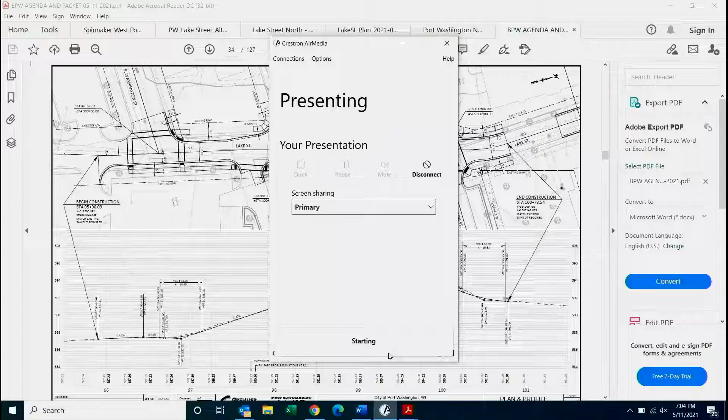Okay, super. All right, so we were standing, of course, here out in the field, and so the first thing again we looked at was trying the best we could to square up this intersection. So in order to do that, the sidewalk crosses the right-of-way line. You see the right-of-way line is here. All right, and so really you're only taking about a 10-foot by 10-foot triangle as a pedestrian easement, so that's something we'd have to discuss with the Lighthouse condos, and if we can't do it, then we'll have to go back to doing the best we can to make this intersection work, and it won't be squared up as well. But my takeaway and the consensus from the board at our meeting was that it's acceptable the way it's drawn up.

Yeah, okay, so moving downward or southward, as we discussed, by eliminating the one parking spot here. See, there would be no parking available here or here, and of course there's none permitted anyway in this block, or here, or here. So we keep parking here on the west side for this block. This allows us to create an 11.5-foot sidewalk between this, this is the new Newport Shores building here. So this 11.5-foot sidewalk would be consistent with what we have on Franklin Street, would allow us to cut out a planter, or I should say a street tree planter or two. We haven't placed those yet, but possibly some site furniture or other amenities down here.

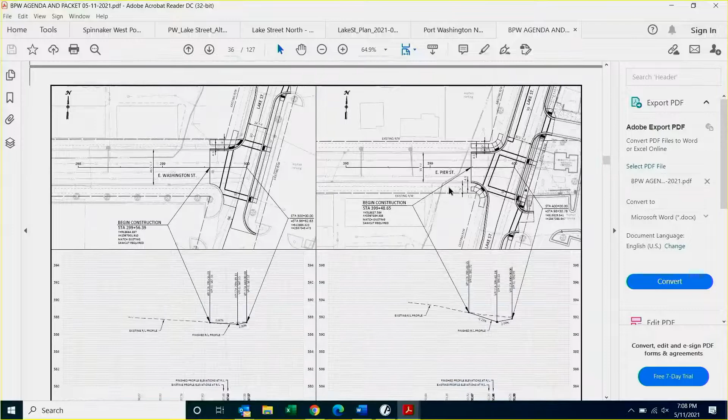Let me jump down to Jackson Street. As Dan mentioned, this is it right here, tracing the force main that we're replacing. So here's where these proposed townhomes are. If these move forward, we're going to kick the curb out here to allow them to put in driveway aprons.

That removes parking, which is what allows us to increase the terrace area. We'd bring this terrace area out a little bit too. This is just a 2-foot terrace area. And so we gently transition...

Towards Harborview Lane. And actually in reality, we'd probably carry this curb through the intersection because there's no parking there as well. One of the comments we received at the meeting was to double check the turning movements coming around here. But you can see where the existing curb is.

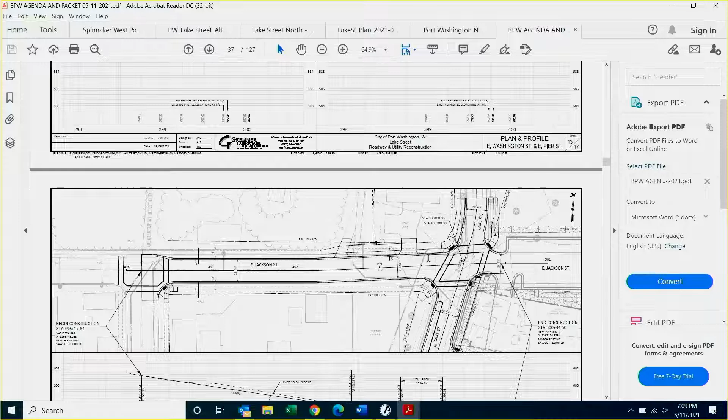This is the light. These are the light lines here. So this is actually going to improve this right turn here. And even for a left turn here, I think you're going to bring a smoother turn for semis coming around to either the filtration plant or the wastewater treatment plant.

This is the 8-foot sidewalk between the interurban trail - I guess I'd call it a multi-use path. This was an application that the city made to the DNR several years ago for a stewardship grant. We received the grant and have just been waiting for Newport Shores to kick in so we could construct that path. So now you'll have a connection between the gateway to the breakwater and the interurban.

That may be more detailed than you wanted to hear, but if you want any other details on it, I'd be happy to go over it.

Is that terrace between the back of curb and the 8-foot path wide enough to plant trees in? Or is the 4.5 feet measured from the face of curb or from the back of curb? Back of curb. So we could potentially plant some smaller trees. Yeah, yes.

When you look at a tree lawn, the bigger the better. But we have the tree planters downtown - those are only 3 feet wide by 5 feet long, and you can still fit a decent tree. Even coming in on Grand Avenue, that's only a 3.5 foot terrace, and at maturity those will be medium-sized trees, but they have really taken off. I don't know if anyone pays attention besides me coming into town, but those trees that were planted about 10 years ago have really matured well and create a nice entrance to the city.

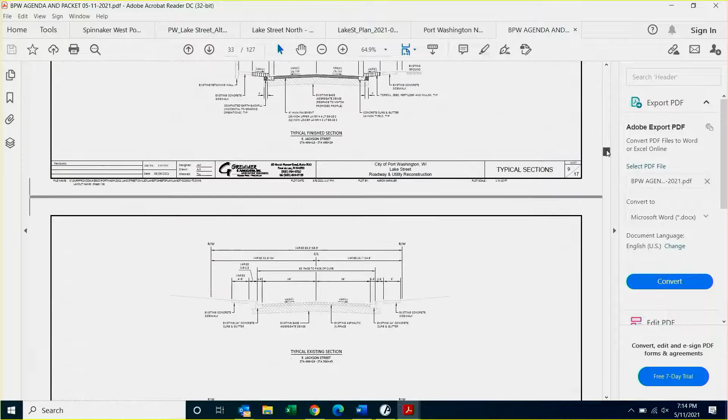Rob, back on Lake Street and East Jackson on the filtration plant side. The way that curb comes out, does it have to be that far out? You're talking here? Yes, okay. If we're trying to square stuff off, would that be better to open that up a little bit?

Yeah, I guess, well, I could ask Jeff, you'd have to come up to the microphone here, but I think it was done intentionally. Of course, this portion of it is designed by, this is the part that we're matching from Newport Shores. They designed this part. So I think what we're trying to do is essentially match the curb line, the south curb line, is what I think we're trying to do.

Yeah, is there any other reason to come out other than probably just the grade of catching this crosswalk here into here? I mean, it gives you a little bit more grade to work with. Well, I'd say it looks like about a 5-foot deflection there that it sticks out. And in that case, it's going to be visible, so it's not likely to get clipped by vehicles. So I doubt if it's that problematic.

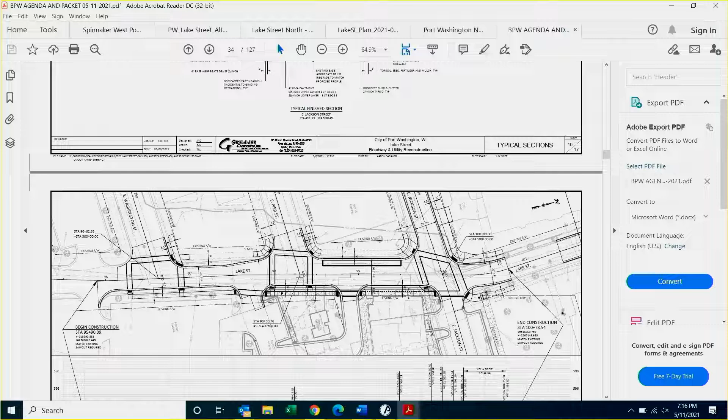Yeah, I would say it's probably going to make plowing a little easier than if you had the curb farther to the south. But I don't drive a plow. Right, they're not plowing. Right, they're not responsible for plowing Jackson anymore anyway. And honestly, I don't think that's going to affect them. Yeah, I mean, right, so Newport Shores is going to be responsible for plowing all of this, and as you can see, there are many nooks and crannies that they're going to have to plow. So I don't think this is going to add any level of complexity to the snow plowing.

Right, yeah, right. Is it wide enough for an emergency vehicle? It's kind of hard to... Oh yeah, I mean, I think right here, this is 24, and again, this was Newport Shores design, it's 24 feet. So it looks smaller than it is, but it's 2 car widths. I mean, it's two full lane widths.

So the only other comment that we really haven't addressed, Alderman Gasper has brought it up a couple times, so I'm not ignoring it, is pavers. And I guess if we have it as an alternate, would you like... I mean, are we looking at if we put them in the entire street, we're concreting the street, and then we're putting pavers over the top, and that gets a little...

Right, I'd be nervous about putting pavers just on a sand base in the street. Well, if you're doing permeable pavers, that's generally what you would do. Yeah, you have an aggregate base, and in that case you end up with a thicker aggregate structure in order to distribute the forces versus just asphalt. You can do pavers on concrete, I've done that on projects. Doesn't always work as well as you would hope. Yeah.

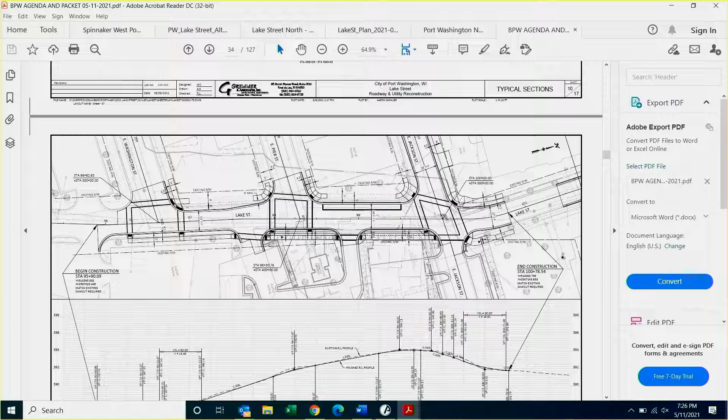Do you need a motion for that, Rob? The Lake Street design approving? Either that, or if that's the consensus, I'm fine going forward. I don't know, I'm looking at Jeff, do you need any more direction? Yeah, go ahead.

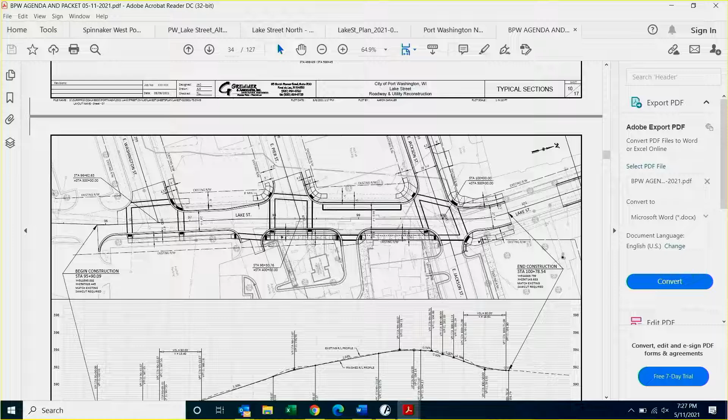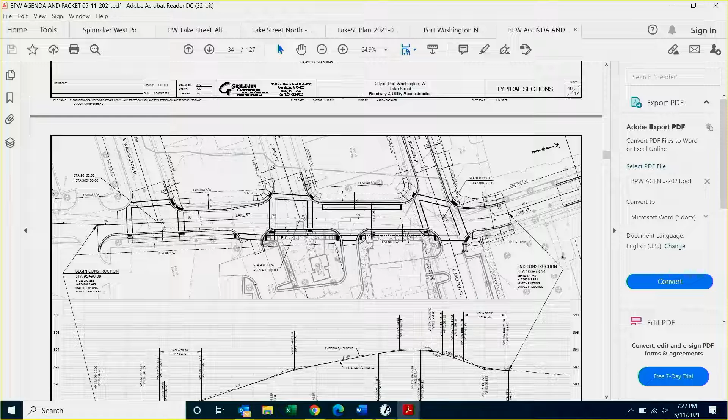I think generally we're looking for some direction because my understanding is we're still trying to get this built this fall. So if we're going to stay on that time frame, we're in May, we're going to be losing some construction season if we extend this out too long. So if we can keep everything condensed and get decisions sooner rather than later, one on geometry and two on the permeable paver concepts, because if we lose, say, two months by the time we get somebody in here to give a presentation at the monthly board meetings, we may be into late season construction.

So my recommendation is, you'll design it as if it doesn't matter what it's made out of. And then for bidding, we'll get in touch with either Unilock or the county, get a spec from them, get an alternate, and when the bids come in that night, we can make a decision and have someone here from the county or Unilock to assist in making that decision. So the way I see it, it won't delay us at all.

I just need the direction because I'll be designing parallel. It's not just switching out asphalt for pavers, right? It's not that simple. I'll have to do additional work to figure out what that sub-base thickness needs to be. There's quantities for aggregates, quantities for sand, quantities for pavers, asphalt, and we're running a parallel path on how we're bidding the project. Again, it's not as simple as saying 4 inches of asphalt or 4 inches of permeable pavers. I hear you. The geometry stays the same.

Rob, I've got a question. Did you ever consider concrete pavement on Lake Street?

I didn't purposefully not consider it. I mean, that is one option as well. The problem with concrete pavement is there's curing time, so timing-wise between the construction of the high rise and pulling boats out of the marina, it would get a little challenging to try and stage that.

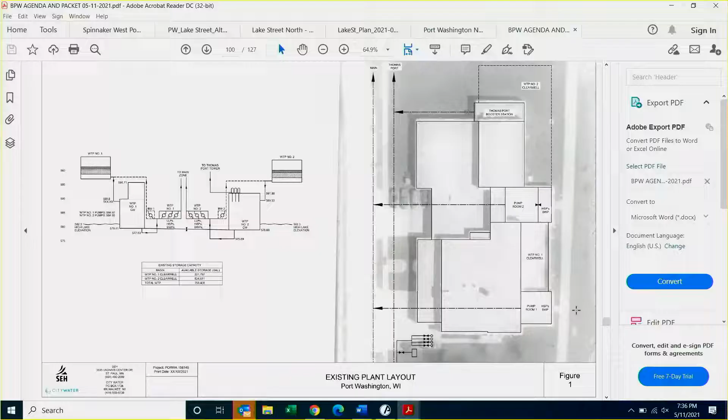If you can bring it back up, I'll quickly go over some of this in the report. Let's go here. And while Rob's doing that, I'll go through a couple of the goals we mentioned in the report for when we're looking at these alternatives.

Of course, we've got to meet EPA and DNR code. We want to maintain the operational flexibility and simplicity already in the plant today. We want to maintain service when a clear well is out of service for inspection, which is a minimum of a 5-day period. We want to maintain about 75% of the existing storage at the utility plant today. We want to minimize any impact to the open space along the lakefront, and maintain the ability to add a second barrier if needed in the future for treatment, and of course incorporate the new generator into our alternatives.

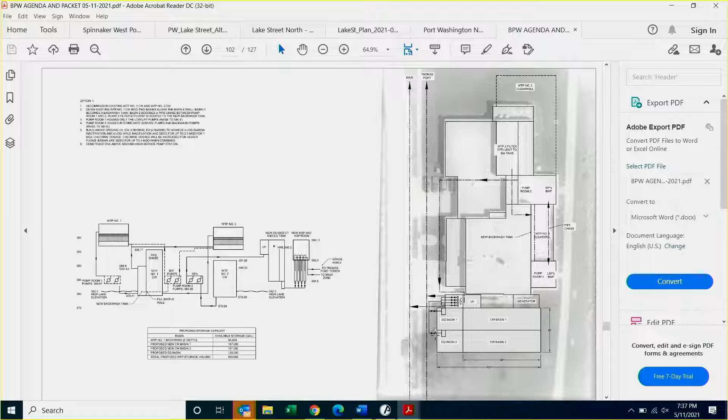So this is the existing layout of the treatment plant that's there today. This is the addition. Sorry, this is option one. So option one is really doing nothing with the clear wells today.

When we met with the DNR earlier this year, this was one of the alternatives we proposed — we said we're not going to raise the floor level of the clear wells. In that case, we lose any of the disinfection credits we're currently receiving inside the treatment plant. We get a disinfection credit for chlorine we add inside the plant and some for filtration. We'd lose all that, which means our new facility, which we'd build to the south end of the plant, needs to meet 4-log removal for viruses and 3-log for Giardia. But we don't have to do anything with the existing clear wells, so they were fine with that. They liked that option.

In option number one, we add UV into the treatment train. That way our clear well can be a little bit smaller, which cuts down the retention time needed to gain our disinfection credits. On the west side of the addition is where we'd have our pump room. All the high lift pumps currently in the plant would be replaced with new high lift pumps on the west side of the addition, along with the Thomas Port pumping station, which would also be in the new high lift pump room. The existing Thomas Port pumping station, on the north end of the plant, would be abandoned and repurposed for other means.

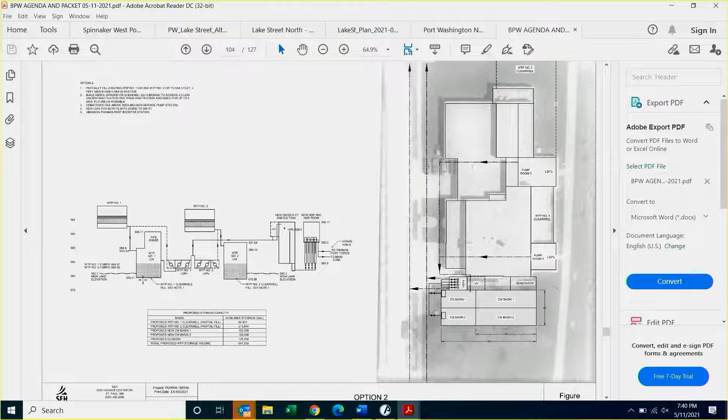floor of the clear well up so that we'd meet code. The problem with this is we would lose so much of the volume in plant number one's clear well that we could no longer meet our contact time or our disinfection credits. In order to do so, we would have to really increase the amount of chlorine we add into the treatment process. Right now, Leo, what do you add?

You're leaving the plant at about 1 part per million? We're leaving the plant right now today, 0.95 to 1.05. So in this option, for plant number one's clear well to remain in service, we'd have to run at about 3 parts per million, so in a sense tripling what we're adding today.

And then plant two still has enough volume to meet the required CT time and disinfection credits, but that would be at the 1.0 parts per million Leo was talking about. So we'd have 2 different plants operating completely differently, but going into the same distribution system — just not a very viable option to do that.

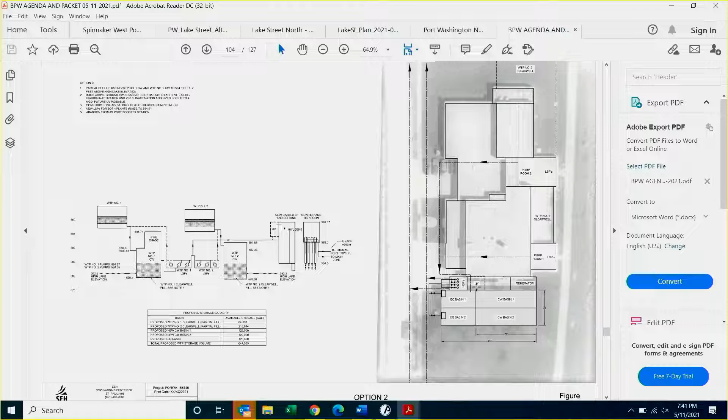So again, we can't just fill the bottom of the clear wells in. We have to have another clear well on the south side of the plant. In this option, we have space for UV to be added in the future if need be, but the clear well is sized so we can get our CT times through it. We'll continue to have the existing CT times through our treatment process that would be applied. So our clear well design is a little smaller in this option, and we'd be looking at having our high lift pumps moved to the west side of this clear well.

The other thought process we had: today each plant is operated independently of one another. Our low lift pumps that bring water into plant number one are in plant one. We can't pump any water from our plant one low lifts into plant number two. So as part of each option, we've built in some of that flexibility. Now we'd be turning pump room number 1 into a low lift pump room so it can pump into plant 1 or plant 2.

And then in plant number 2 pump room, we put in our intermediate pumps that pump water out of our existing clear wells today and put it into our new clear well. We'd also have our backwash pumps located there, and either backwash pump could pull water from either clear well and distribute it to either plant. Because today we have one backwash pump in each plant, and if it goes down, we just can't run that plant. So we really wanted to make sure we're building in that operational flexibility into each project.

The other concern the DNR had with our pump room is that, if you've been to the plant, you've seen it's submerged below grade. They want to make sure our motors are above grade — that's another code violation they're going to make sure we fix as part of this. So in our cost estimate, we do have that addressed as well, where we raise the motors up.

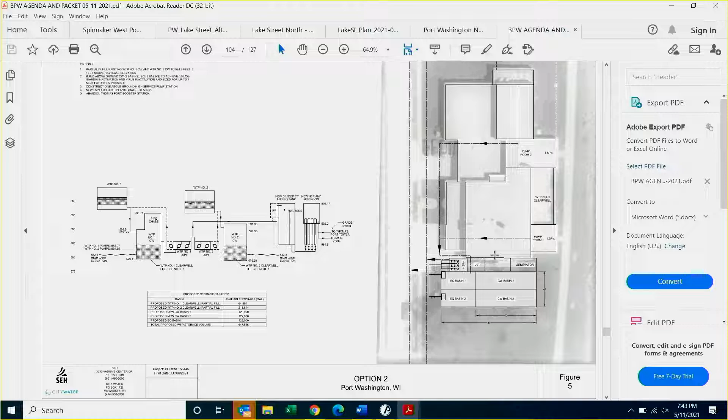The other major aspect of our project is the electrical equipment that's in the plant today. A lot of it is at or past its useful life, so we're upgrading a lot of that electrical equipment. Again, a lot of the master control panels are below grade. We would need to raise those above grade as well, so they're not susceptible to any flooding that could occur.

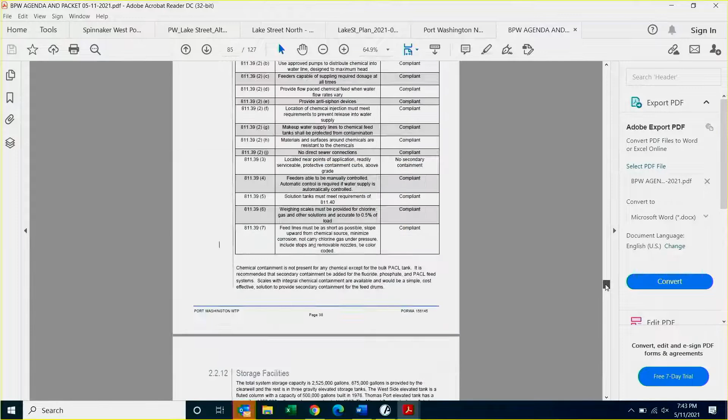There are other highlights here about the end of useful life of a lot of things - lighting inside the facility, the SCADA system has reached its end, and we're going on eBay to buy parts for updating our SCADA system. So while we're doing this project, how much of this do we want to incorporate into the overall cost of the project, because it's close to the useful life on a lot of things in the plant.

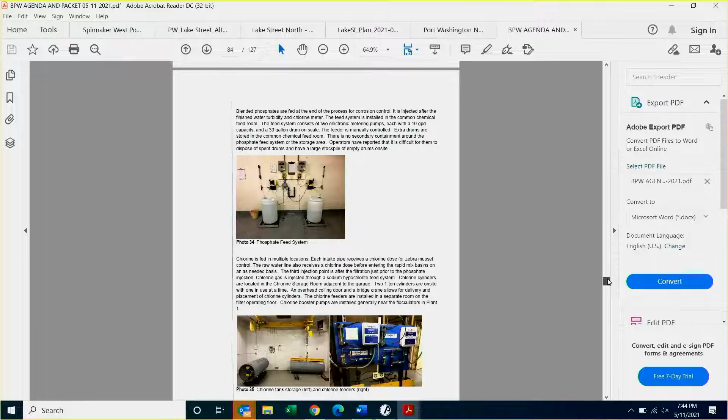So we came up with - and again this is like a 15,000 foot view of the plant - on the two alternatives that we looked at, two cost estimates. I think there were about a little over 13 million and about 14 million right now. And I don't think we have an action item on today's agenda to make any decisions here, but that's the cost of doing a lot of these improvements.

Let me just jump in quick. Option 1 is 13.5, option 2 is 14.2, and option 2, that flowable fill that Tom was referencing, comes close to 1,800 cubic yards of fill, flowable fill, just to fill those clear wells. That's a lot of fill at a lot of cost.

One thing I will say, all of this stuff that we're going to do, we are not going to make any better water than we're putting out today. The water coming out of that treatment plant is great. All this is a lot of things that the DNR is telling us to do. There's a lot of things that need to be done down there. Clear wells being moved like that, that's a matter of opinion. And the DNR holds that opinion, and we've got our marching orders. As sad as that is.

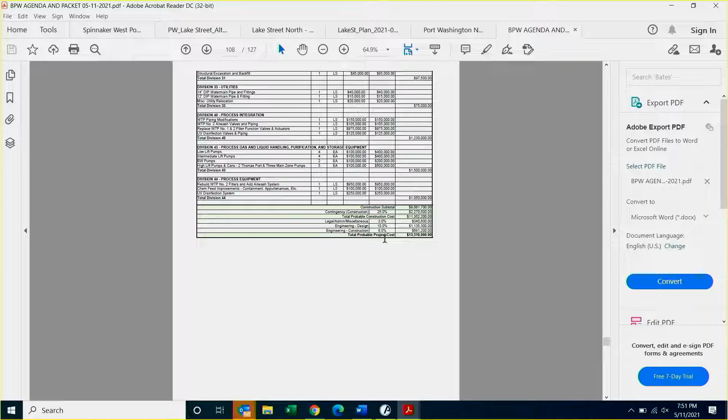Okay, Leo, the generator — was that something we okayed a while back on the controls, or did we have some... You brought something to the board a while back, probably within a year. That was this study. That was this study. Okay, so this — we didn't buy a new... well, that's different.

Wait a minute, are we talking about the AWIA, or are we talking about this study? Well, the AWIA is a risk and resiliency study that I brought this year. Right, but wasn't there a generator package on one of these? That's from last year, yes. Okay.

I thought we kind of said go ahead with that, didn't we? Or talk about the generator, but not the complete needs assessment. I've said this numerous times — I don't want to buy a generator and put the wrong generator in, and then in 2 years go through the plant and fix things and say, okay, we spent $750,000 on the wrong generator. Now we got to redo it.

That's why the needs assessment was done by SEH and City Water, and there's been a cost analysis. Tom and Eric that he works with at City Water have all the numbers ready to crunch.

Now that we see these numbers, we can put it into a model, correct? Yeah, we do have a financial model as part of this project. When we look at dollar figures, we put that into our financial model to determine what that's going to do to your rate structure for your customers.